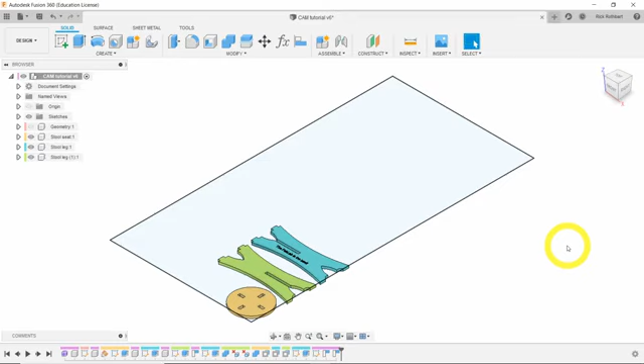All right, let's switch from the Design workspace to the Manufacture workspace. Move your mouse to the top left of your screen and click where it says Design. Now move down and select Manufacture. If you have an older version of Fusion 360, it might read CAM instead. Don't worry, Manufacture and CAM are the same thing.

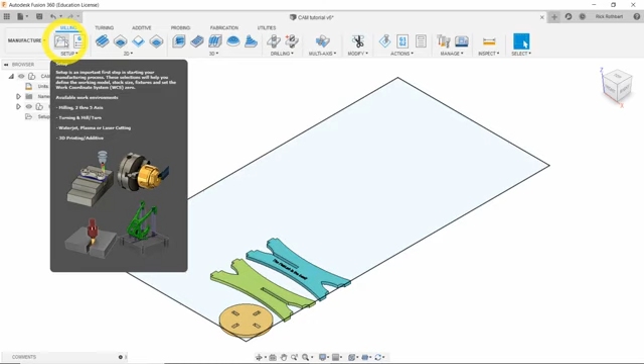Now that we're in the Manufacture workspace, we're going to start up here in the top left by clicking the Setup button. This is always your first step when designing your toolpaths. Let's take a look at the setup screen here. We have a short list of properties to change.

The first thing we want to ensure is that the operation type is set to Milling when using a CNC router or ShopBot. The next thing we want to do is ensure that our work coordinate system is set up in the proper orientation as it relates to our CNC router.

I want to take a moment to explain the work coordinate system and why it's important to set it up correctly.

Imagine a CNC router as if it were laid out on graph paper. In one direction we have an x-axis, and in the perpendicular direction we have the y-axis. Taken together, we have the x and y plane. The bed of our ShopBot, or any CNC router, exists within this plane.

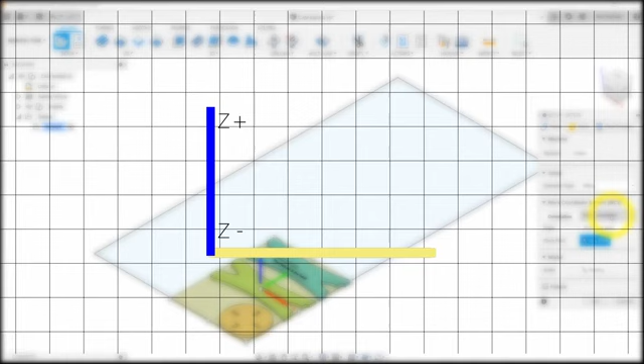Perpendicular from the x and y plane is the direction of the sky. This is the z-axis. We need to ensure that the x, y, and z positive directions within Fusion 360 match the actual positive directions of our CNC machine.

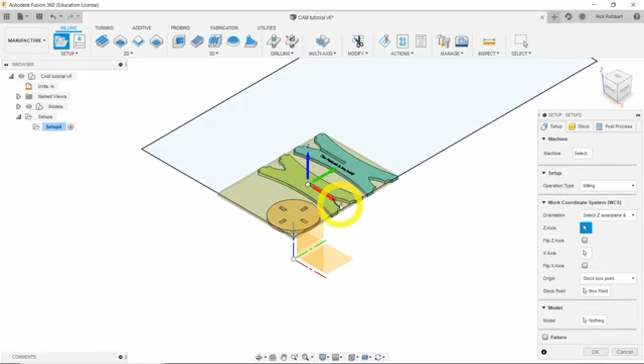So let's go ahead and do that by changing the orientation from Model Orientation to Select Z-Axis/Plane and X-Axis. The first thing we want to do is select an edge of our model that corresponds to the z-axis of our CNC router. It could be any one of these features you see here.

Then we'll have to find our x-axis. In this case, I'll click the long side of the plywood sketch we drew in the previous video. We're going to need to make sure that the arrowhead on the red axis line is pointing to the right so that it will encompass our entire project. To do that, click Flip X-axis.

Now we need to set up our X, Y, and Z origin, or starting point. To do that, change Origin to Model Box Point. Then we need to choose the bottom point such that the entire project is encompassed by X, Y, and Z positive. The arrowheads in Fusion denote positive direction.

We want to ensure that Fusion knows which models to include in our setup. Click Model and choose the bodies you are intending to cut in this project.

So now we need to set up our stock. Click on the Stock tab and change the mode from Fixed Size Box to Relative Size Box. When we look at the Dimensions section, we should see how big a piece of stock material we'll need to cut our project.

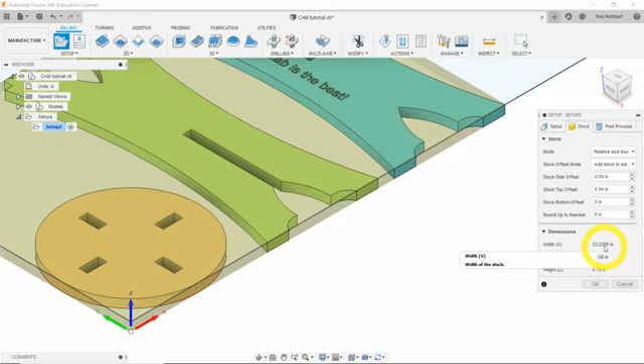Let's delete the default stock side and stock top offsets. When we check our dimensions again, the Z height field should read the exact thickness of plywood that we measured with our calipers. If it doesn't, you'll need to go back to the Design workspace and update your parameters or extrude features so that the thickness of your bodies equals the thickness of the plywood. It's also possible that your bodies aren't in the same plane, so you may need to realign them as well.

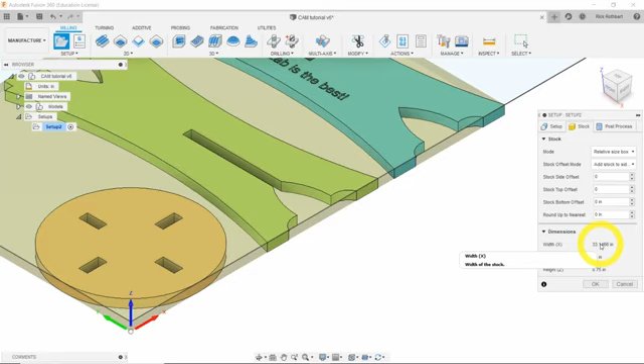Okay, so now that we're done, let's click OK, and now give the setup a meaningful name by double-clicking on the setup icon in the browser and renaming it.

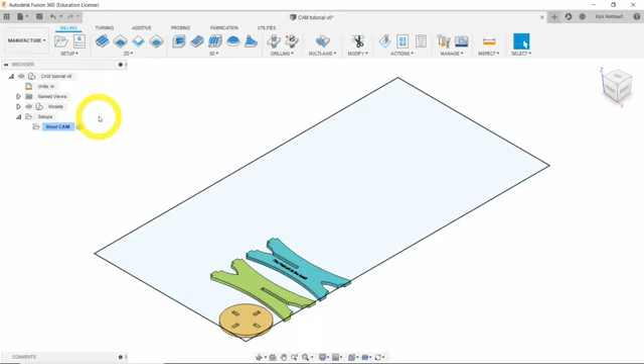All right, good job creating your first CAM setup in Fusion 360. In the next video, we'll learn how to design two-dimensional toolpaths, the first of which will be 2D contour cutting. See you there!